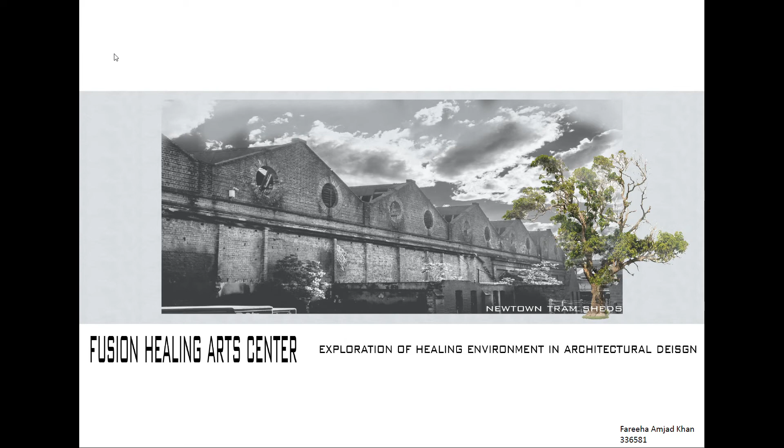My project is about exploration of healing environment in architectural design through creative, interactive areas of light, nature, and color, specifically for people who are suffering from stress-related issues.

Just to underline the problem briefly: stress is a response to a threat, and anxiety is a reaction to that stress. It is caused by a lot of issues, for example overthinking, study, work, etc. But my main focus is on generalized anxiety, which happens from day to day life.

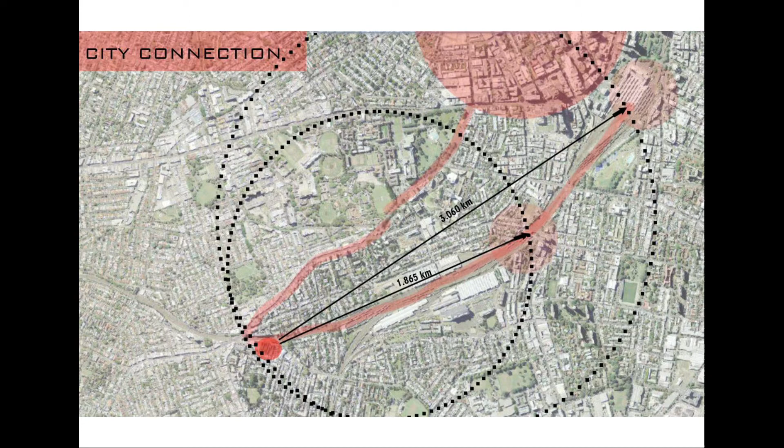This image describes the journey of how I am finding a solution to deal with the problem, and after thorough research I selected a site in Newtown for various reasons, like its social aspect, being a place for artists, but mainly because of its connection and easy access through the train, and it being closer to the city.

Through urban site analysis, I was able to recognize the busy areas, the active edges, and buildings around the site, which helped me analyze what the pedestrian access would be towards the site.

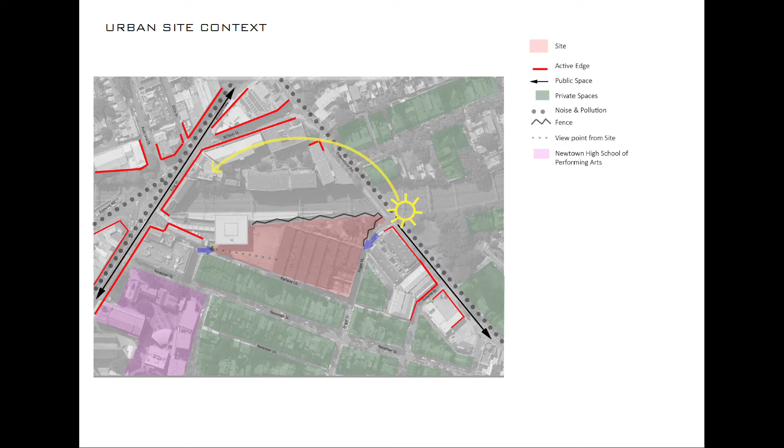It also helped me, after detailed analysis, in reanalyzing the programs which I am providing in the building, such as artist workshops, art galleries, cogitation areas, and a performance theater, along with other supporting programs incorporated within the space.

Coming to the existing site, I started looking into different sections and placing my programs based on what's existing on the site in terms of light coming into the building, its heritage, and existing landscape.

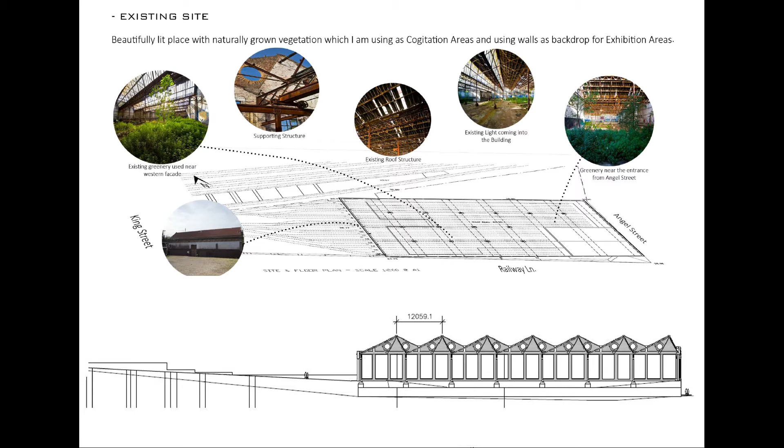The site itself helped me work out around three main core objectives for the project: using existing structure, using nature, light, and color in creating a healing environment and user experience.

This image is a conceptual diagram showing how I am bringing a healing environment into the space, and how through simple ideas and simple programs I can create a space that helps people heal.

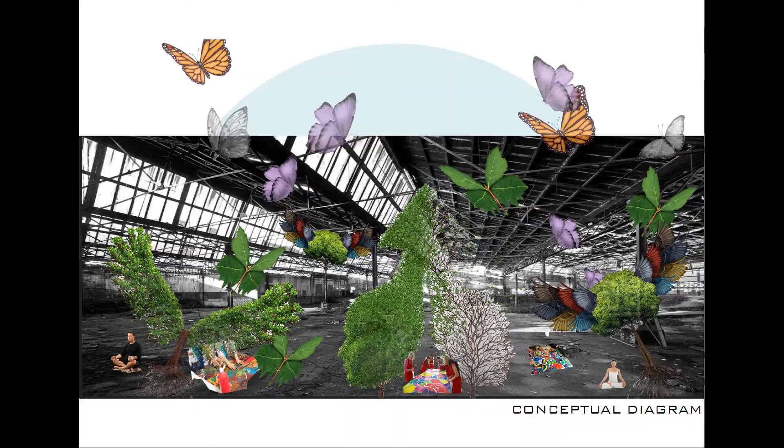This is an isometric site plan of the Newtown tramsheds showing how all programs are placed in the existing structure and the site.

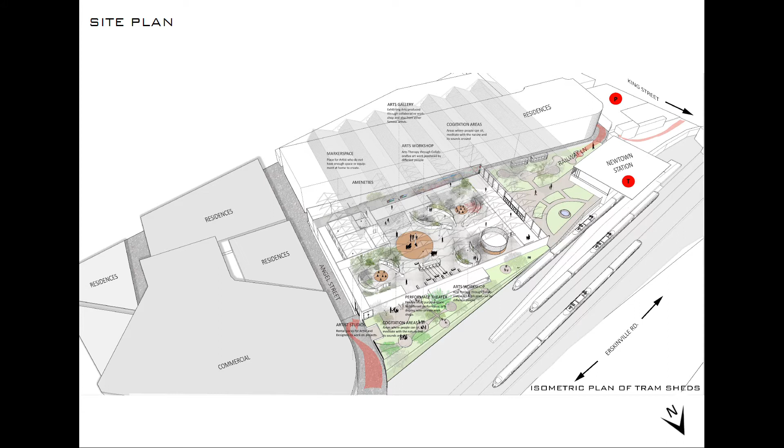When people enter from the railway lane, this shows how they're going to experience the space as they enter into the site, which is also closer to the train station, making it easily accessible by pedestrians.

We can't actually control the perception of people because it differs with every person, but we can prevent perceptual distortion. So the design has been kept very logical and simple so that it doesn't confuse people.

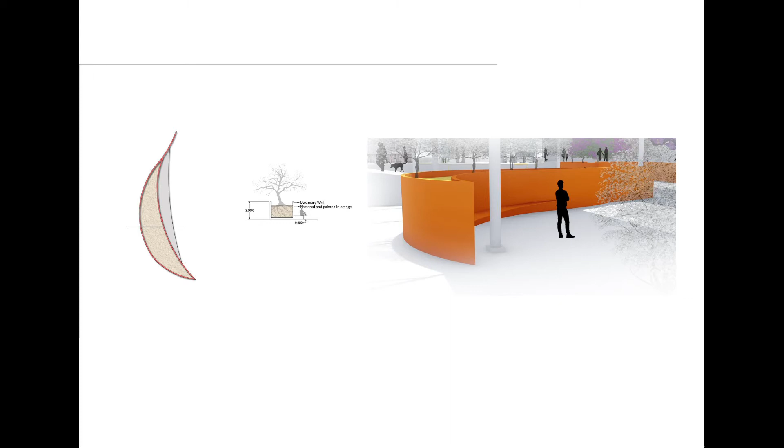The whole building has been kept in white, and the color palette of orange has been used based on the psychology of colors on the human mind.

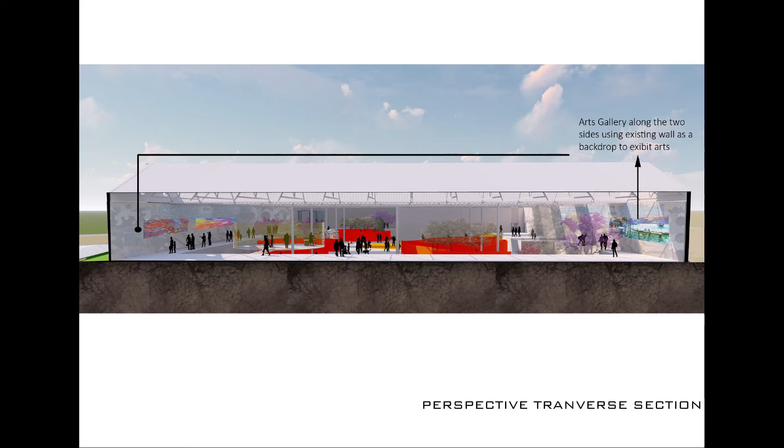The transverse section is more focused on the side walls, which have been used as an art gallery, using the existing wall fabric as a backdrop for exhibiting art.

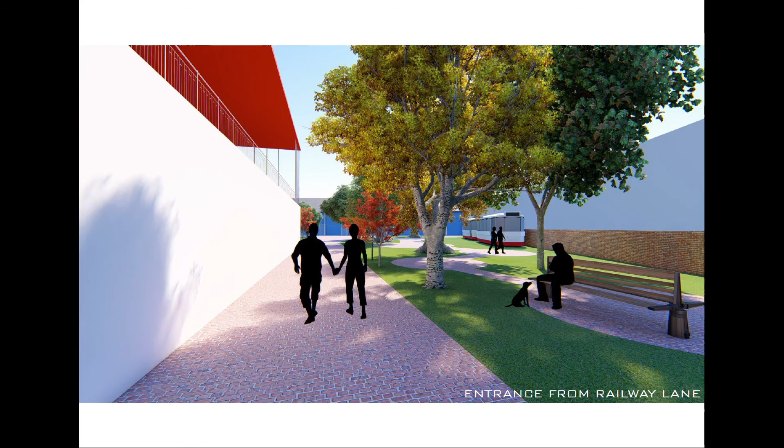This image shows the main access towards the site from the railway lane, illustrating how people are going to walk into the space.

This is the view from Angel Street.

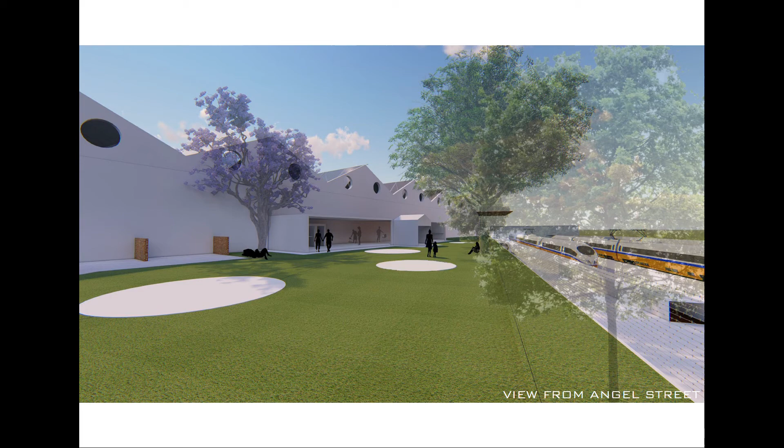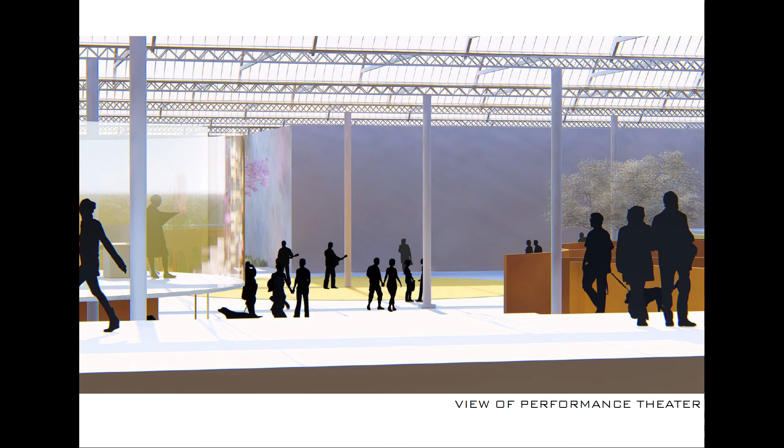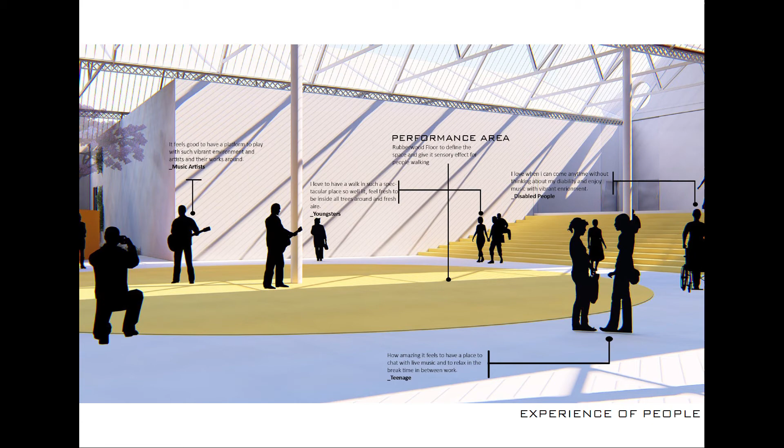This is the view of a performance theater standing in the center when you enter the building, while this image explains the experience of each person, from handicapped to teenager, to artist, kids or adults, so it becomes a safe place for all.

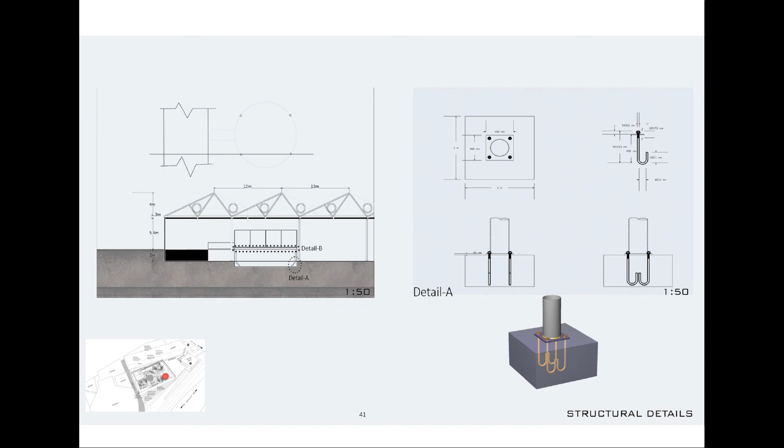This image shows a secluded place created for kids' art workshops, kept on the side of the building with structural support from the columns. This shows the environment where kids and parents can work together, and how the ceiling has been supported to make a clear height of about 2.6 meters.

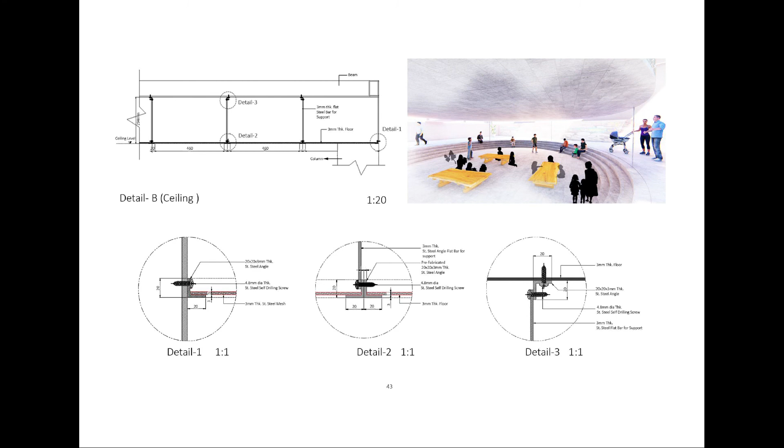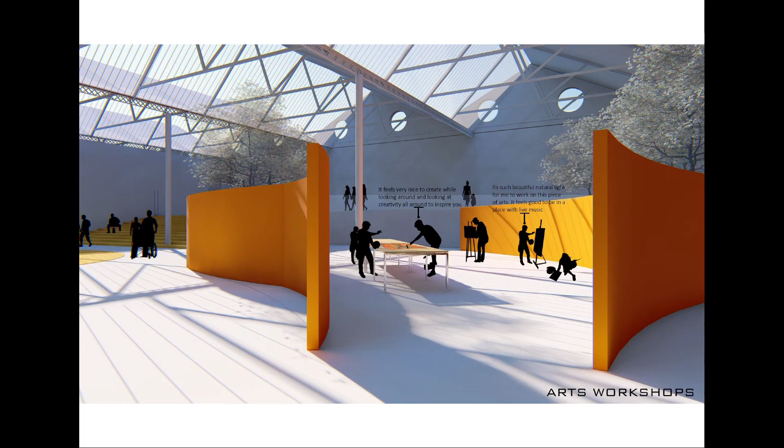For me, these kinds of simple spaces can actually heal people with stress and also create healthier and happier communities, and can also be used as a gathering place for people. Thank you.